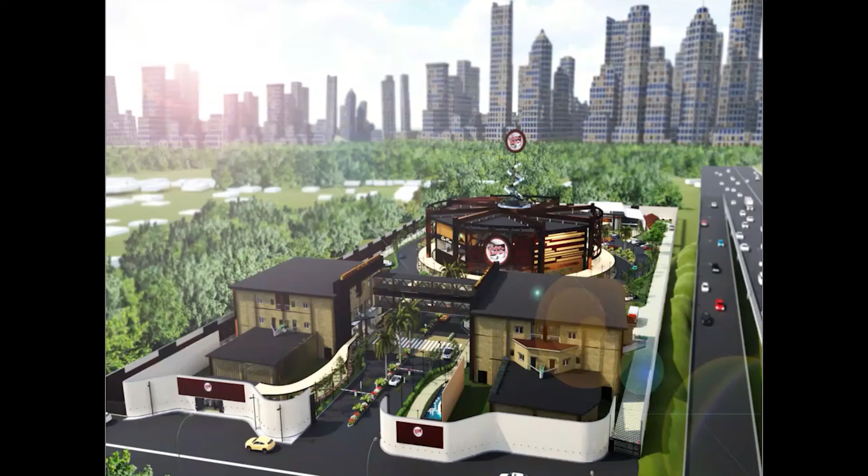Let me once again introduce to you the Karera Akademia, a proposed innovative automobile circuit racing school. Chapter 5, Architectural Design Translation.

5.1 Project Proposal Title and Problem. The project proposal title is Karera Akademia, Proposed Innovative Automobile Circuit Racing School. The proposal is envisioned to provide an architectural design solution for the safety training needs of automobile circuit racing enthusiasts, to be established at the scientifically determined site at Mabalacat, Pampanga.

5.2 Design Philosophy. The proponent was inspired by Norman Foster's philosophy: as an architect, you design for the present with an awareness of the past, for a future which is essentially unknown.

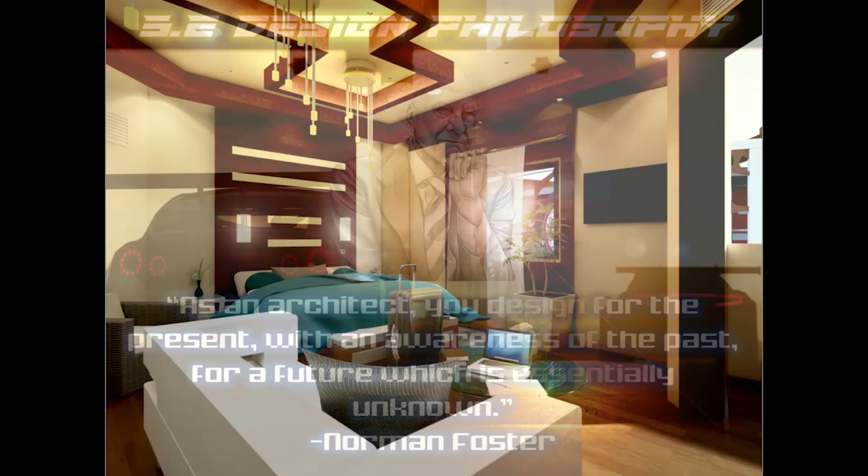5.3 Design Theories and Design Paradigm conceptualized for the facility are natural lighting and cross-ventilation, precast twin wall system, and luxury architecture.

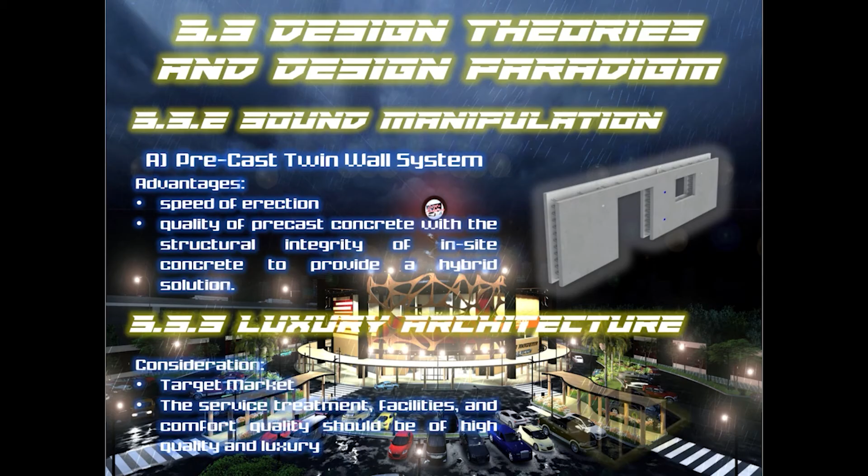5.4 Design Objectives revolve around how the facility could provide architectural solutions regarding the risk of crashing during race trainings, a one-stop concept school, and maximizing the facility's potential to further market the racing industry in the Philippines.

5.5 Design Considerations. Through intensive research, the researcher came up with the most essential considerations in designing this facility: orientation, accessibility, pedestrian and vehicular circulation, building zoning, spatial zoning, target market, low ground clearance cars, privacy and security, building laws and standards, and economical design.

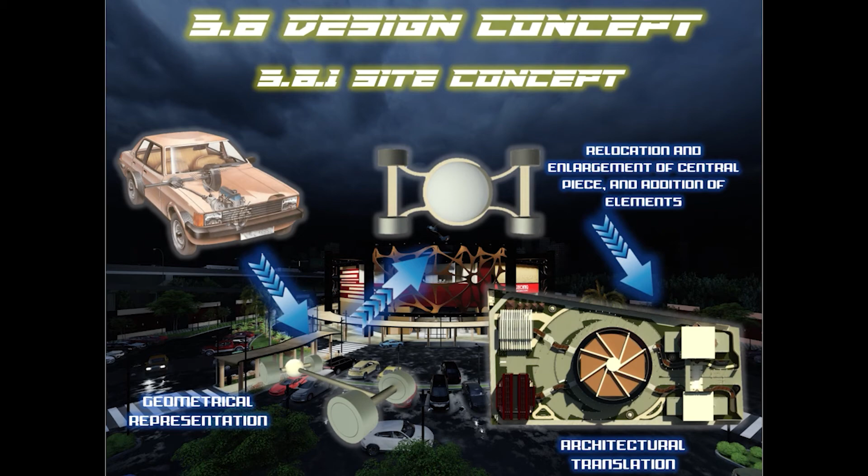5.6 Design Concept. 5.6.1 Site Concept is a car chassis, which represents the backbone of the various parts of the car, the same function as how a site serves the buildings.

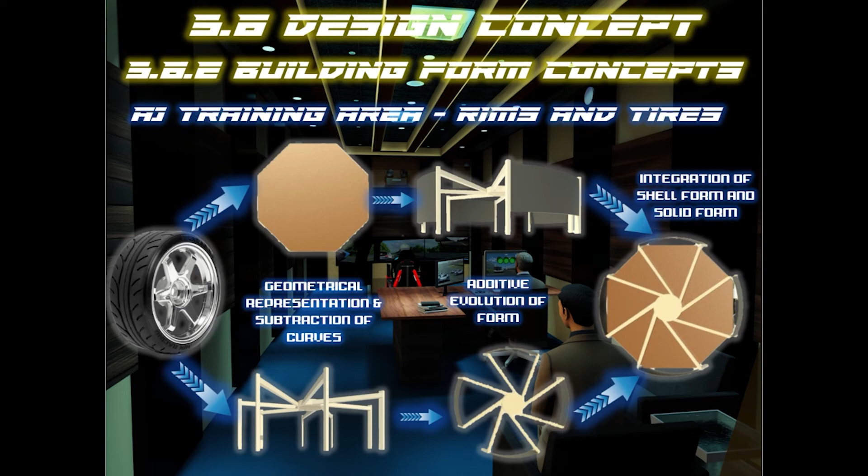5.6.2 Building Form Concepts. Rims and tires inspire the design of the simulation building, functioning as the central piece of a car assembly, similar to how the simulation building functions as a central amenity for the facility. The administrative building is conceptualized from brake discs, functioning as the speed control, comparable to how admin buildings serve as an operations control facility.

Brake hoses inspire the utility building, functioning as a support for smooth braking, just as utility buildings serve as a facility enabling smooth operations flow. Lastly, the accommodations building is developed from springs and shock absorbers because they provide comfort to passengers, just as the accommodations building provides ease and convenience for facility users.

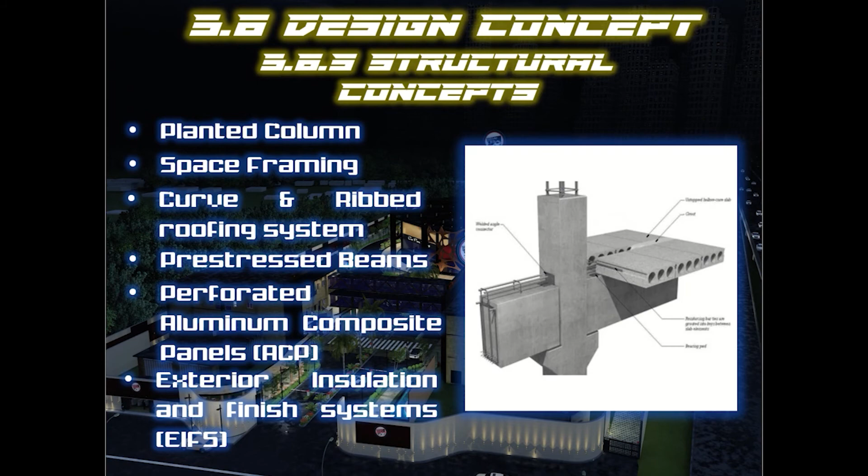5.6.3 Structural Concepts: planted column, space framing, curve and ribbed roofing system, pre-stressed beams, ACP, and EIFS.

5.6.4 Mechanical Concepts: centralized air conditioning, VRF, HVAC, MRL, and car service lift.

5.6.5 Lighting Concepts: general lighting and LED lights.

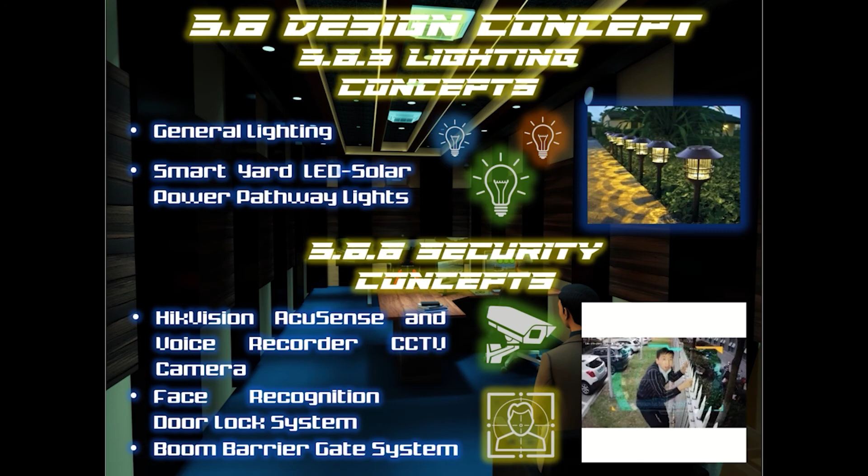5.6.6 Security Concepts: CCTV cameras, face recognition lock system, and automated boom barrier.

5.6.7 Plumbing Concepts: waterless urinals, upfeed water supply, and dual flush toilet with sink.

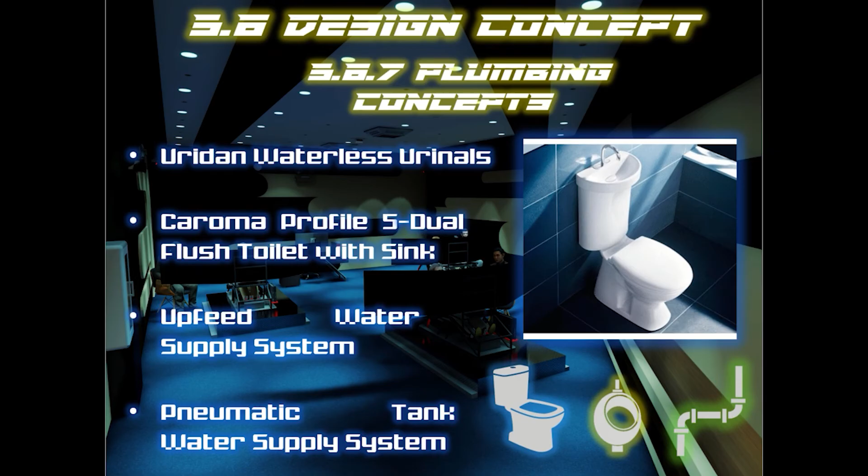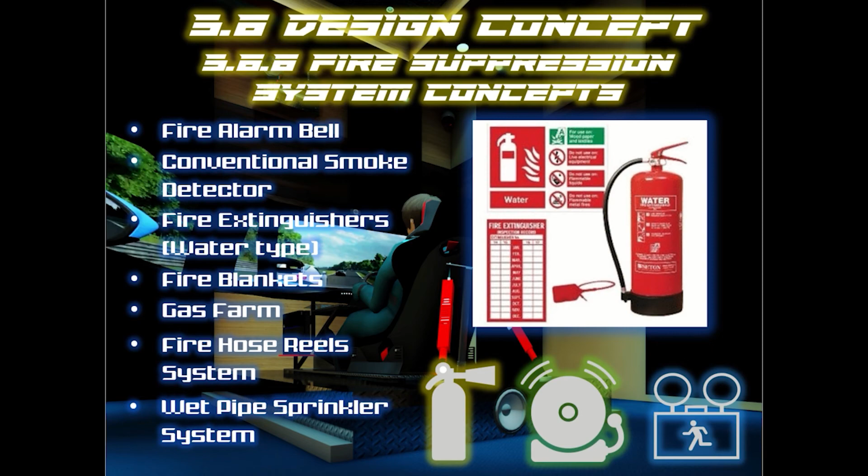5.6.8 Fire Suppression System Concepts: fire alarm bell, conventional smoke detectors, water-type fire extinguishers, gas farm, and wet pipe sprinklers.

5.6.9 Landscape Concepts: turf pavers, road studs, paver lights, and raised pedestrian crossing.

5.6.10 Material Concept: photovoltaic two-way glass and wood.

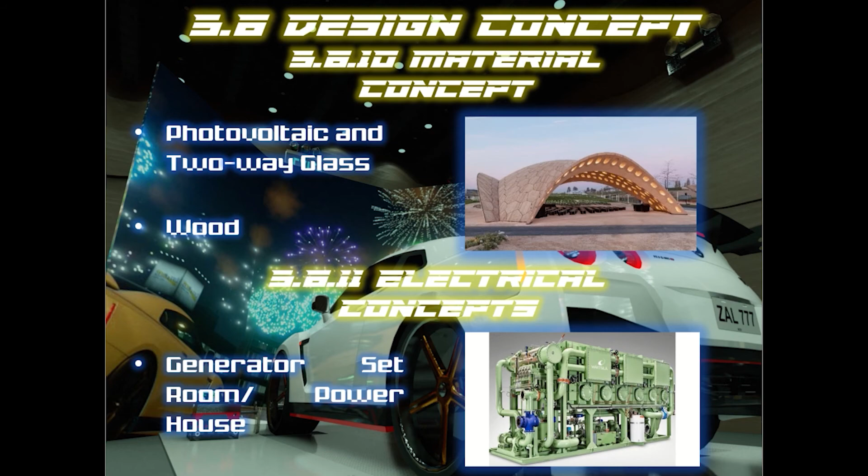5.6.11 Electrical Concepts: genset rooms and powerhouse.

5.6.12 Electronics Concepts: telco cabinets, routers, motion sensor doors, and biometrics.

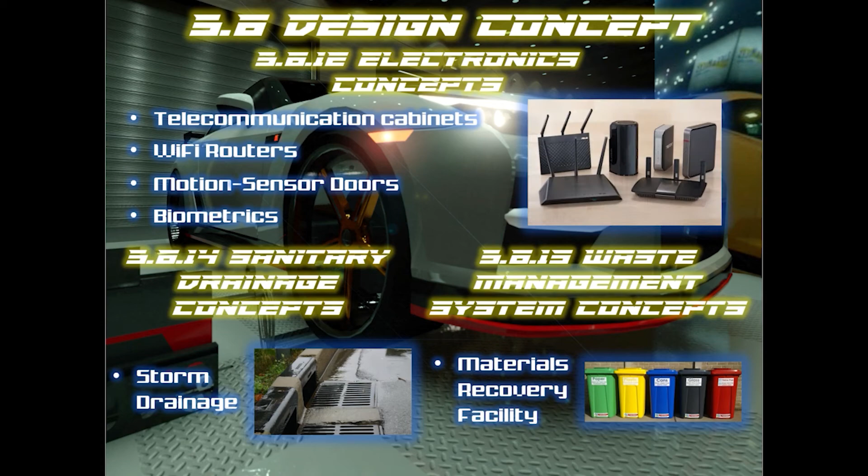5.6.14 Sanitary Drainage Concept is storm drainage.

5.6.13 Waste Management System Concept is a materials recovery facility.

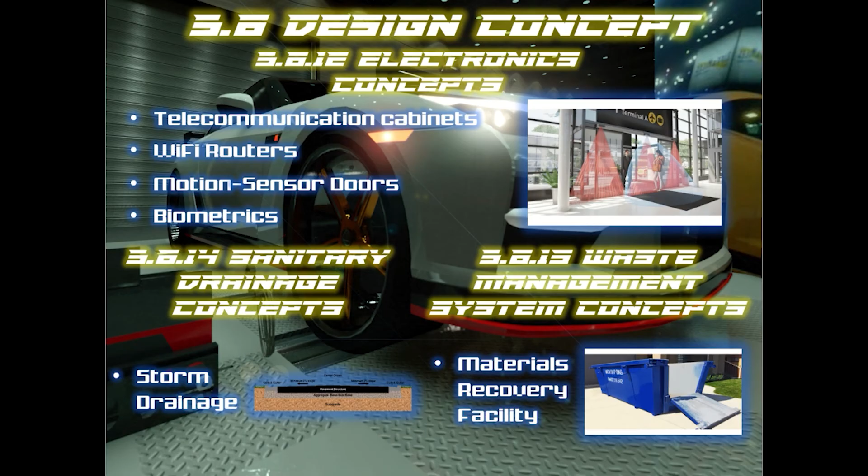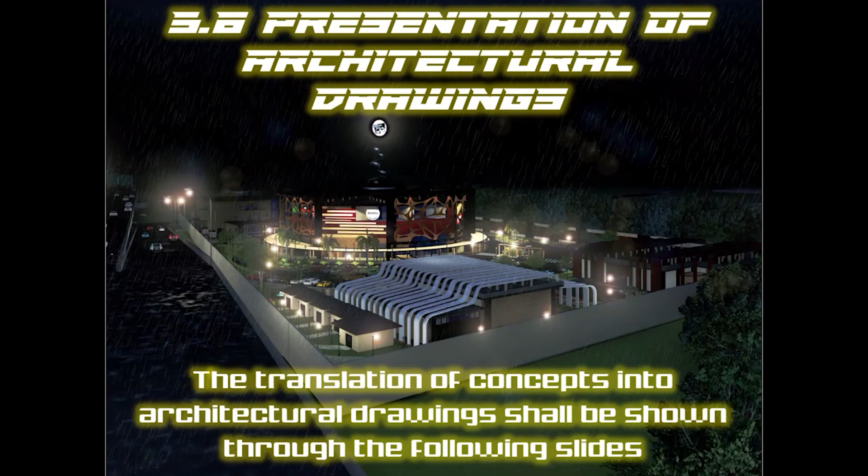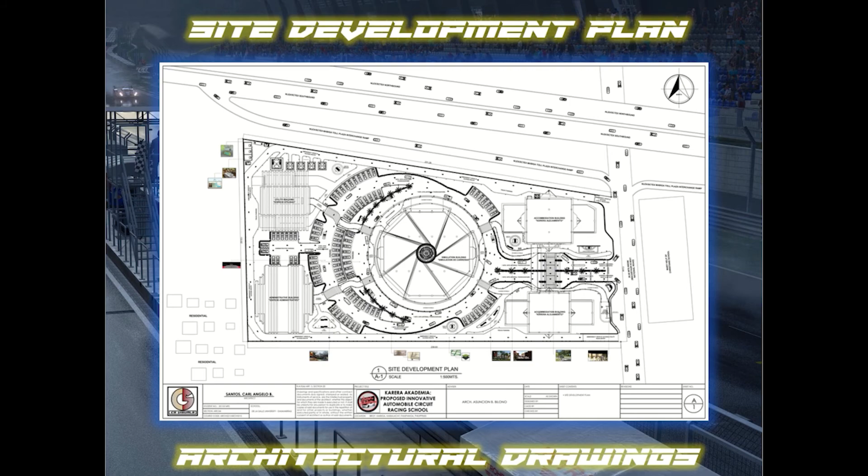3.8 Presentation of Architectural Drawings. The site development plan follows a fluid and continuous planning flow. Hence, the flow of pedestrians and vehicles is meant to mobilize continuously and stop only at designated detour areas. Here is the top view of the SDP.

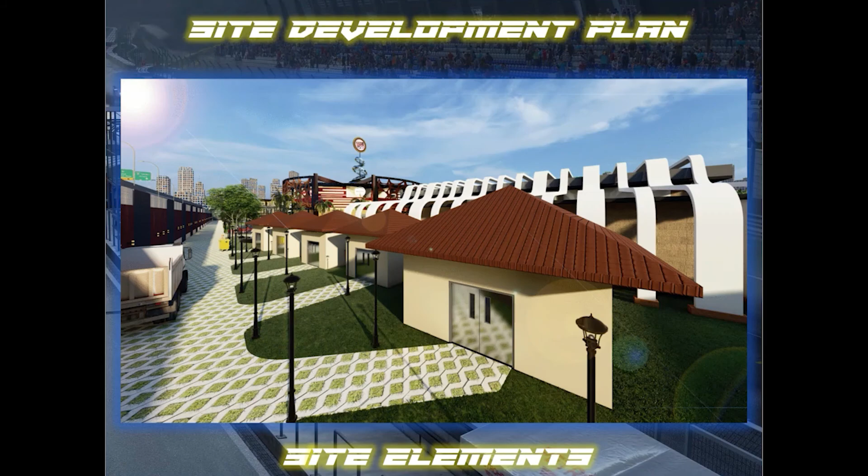The utilities of the facility are the MRF, underground water tank and septic tanks, and emergency vehicle access.

The simulation building plan consists of 3 zones: private, public, and privileged zones. It follows a multi-directional and coordinated planning principle; hence, the diverse phases of the facility function as a whole.

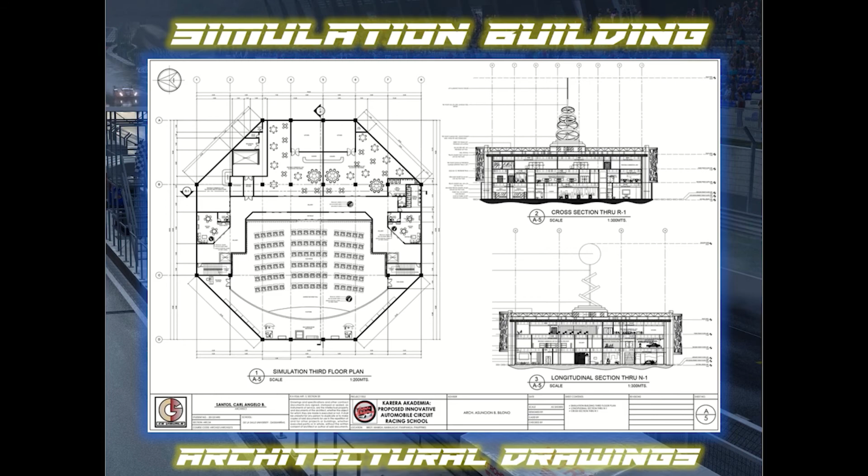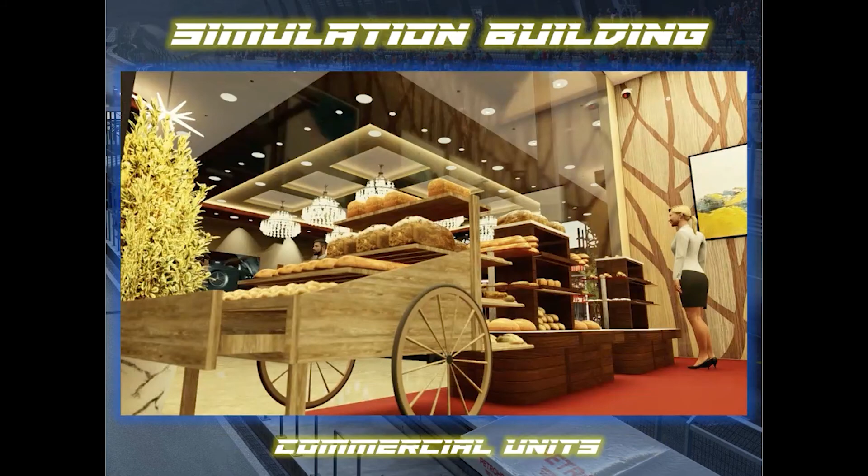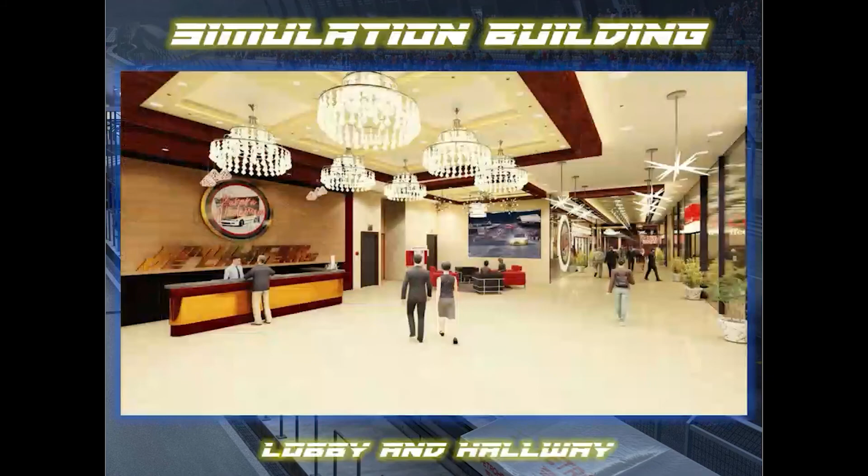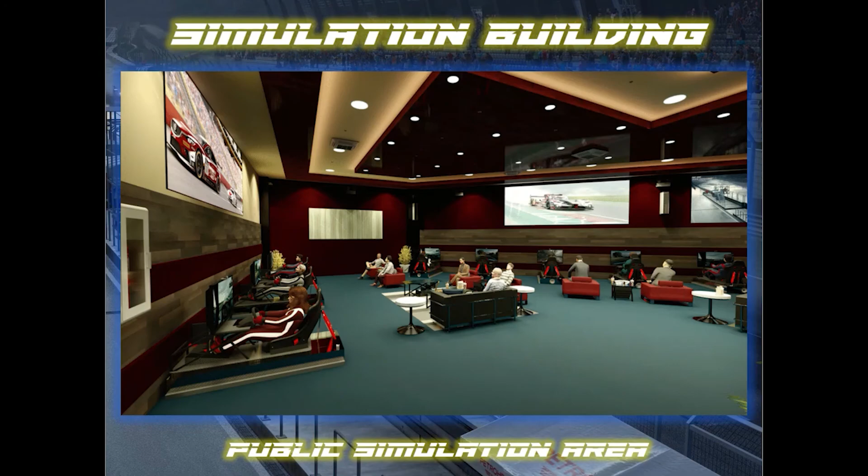OH6 Dove Sim Room, Motorsport Sim Room, CXC Motion Pro 2 Pro Sim Room, Pro Coaching Room, Lecture Room, Tag System TS8000 Sim Room, Bread Shop, Coffee Shop, Registration Area, Lobby and Hallway, Interactive Event Hall, Public Simulation Area, and the Spectators Area.

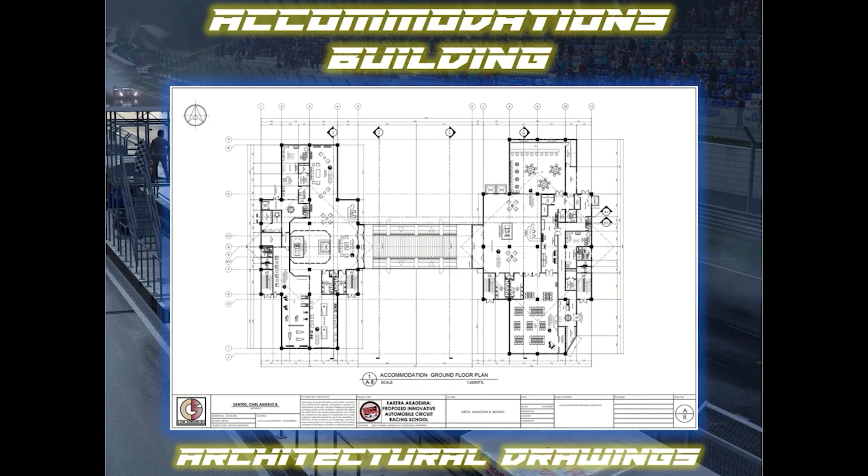Moving to the Karera Alojamiento, or Accommodation Building, the plan evokes the planning principle of limiting factor, thus the majority of the spaces are for private use. It consists of 3 zones: the back of the house, public reception, and rented zones.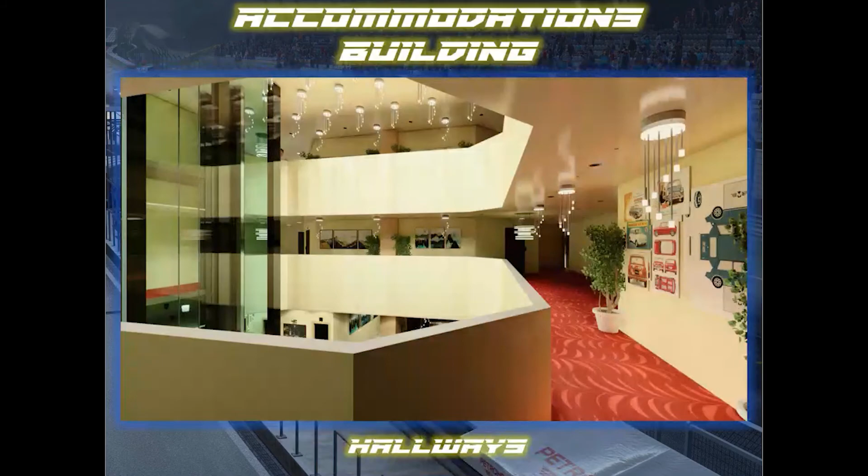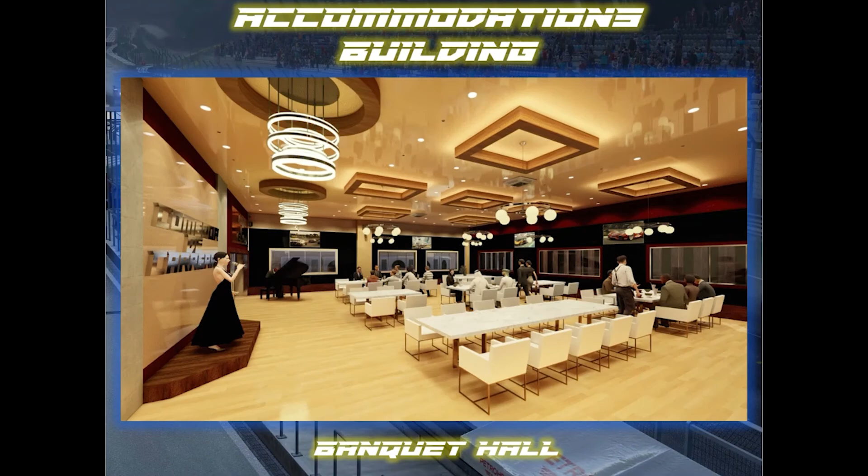Bridge, bar, reading and billiards area, banquet hall, single bed ordinary room, twin bed ordinary room, single bed suite room, and the twin bed suite room.

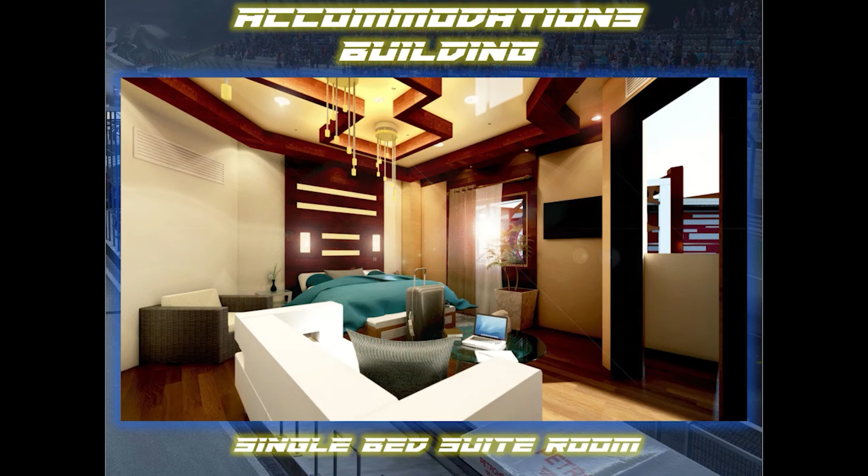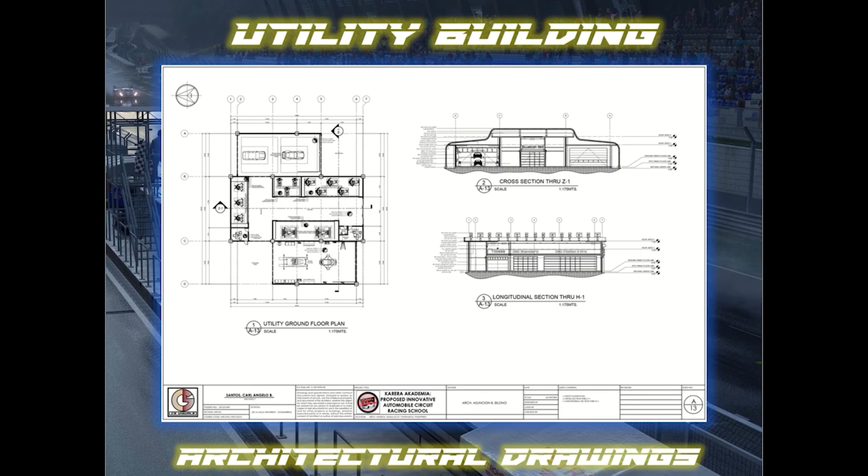For the edificio utilidad, or utility building, it was administered with the planning principle of functionality. Hence, it is focused on providing wide spaces to serve as clearance spaces for the services and equipment mobilization stored and provided within the structure. Utility Building day scene, Utility Building rain scene.

The interior spaces are composed of the storage and reserves room, hallway, and the repair station.

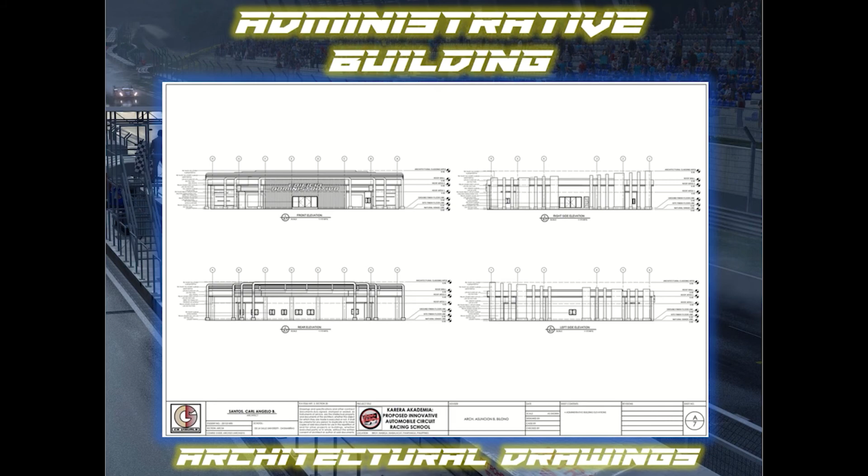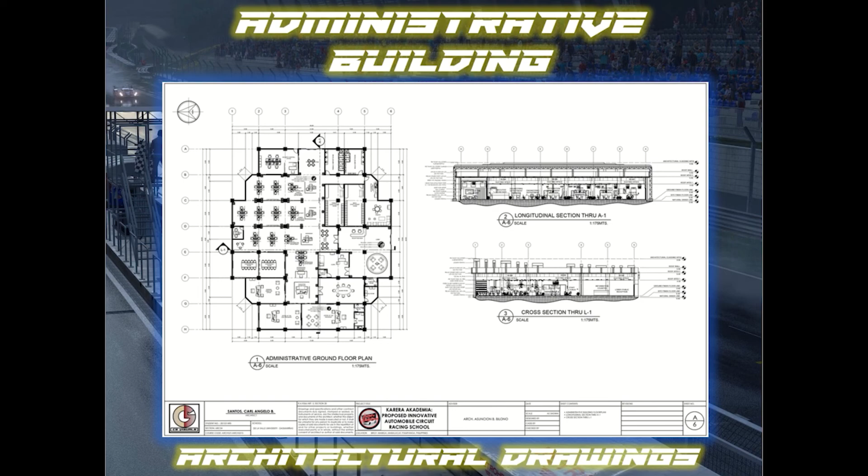Finally, the administrative building consists of 3 zones: the executive zone, staff zone, and the public zone. It follows a flexible and time-bounded principle of planning; hence, the plan can be manipulated according to space demand and generational design trends. Administrative Building day scene, Administrative Building rain scene.

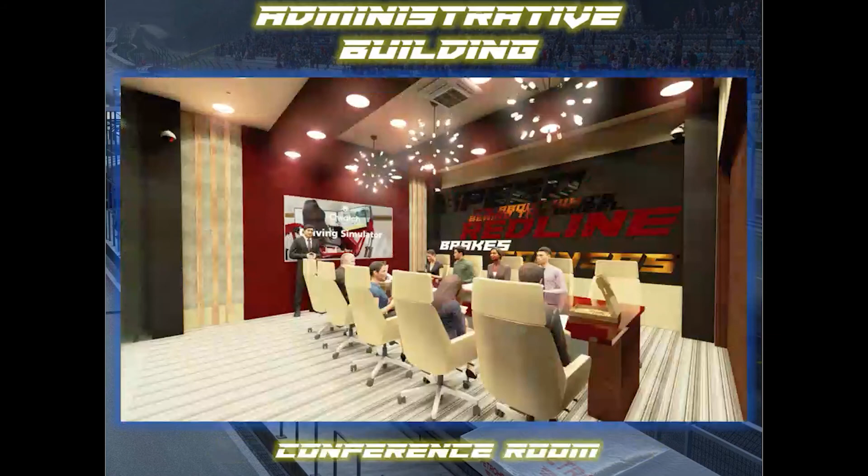The succeeding slides shall present the interior perspective of the administrative spaces: conference room, departmental offices, and manager's desk.

Moving forward, the following slides will show the set of architectural boards for Karera Akademia.

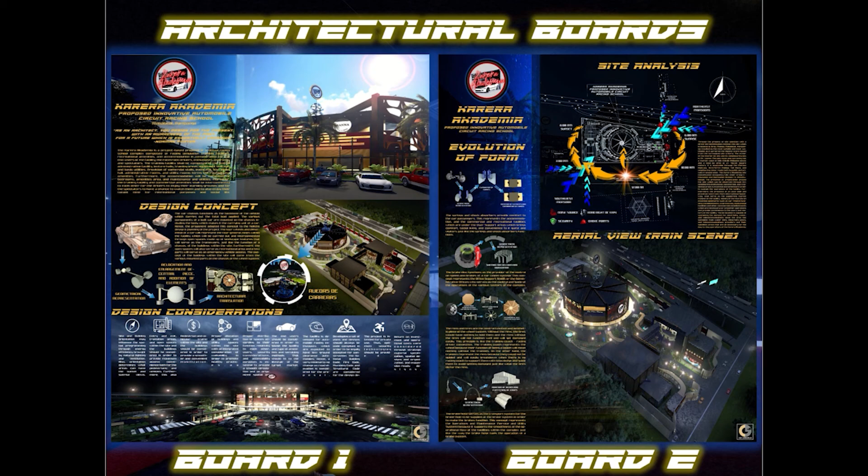Conclusions. The proponent concludes that the Karera Akademia is a complex cultivating a dynamic relationship of learning, social, and economic webs of life. Also, the site and site location were determined scientifically, and the facility is designed to reduce the risk of crash accidents during race trainings. Lastly, a racing landmark was established through an iconic statue of the Núcleo de Carreras.

5.10 Recommendations. The researcher suggests that the study shall have a data gathering update, preservation of the design, provision of auxiliary buildings according to future demand, and design adaptation with respect to the original idea.

And now, allow me to present to you the architectural walkthrough of my proposal.

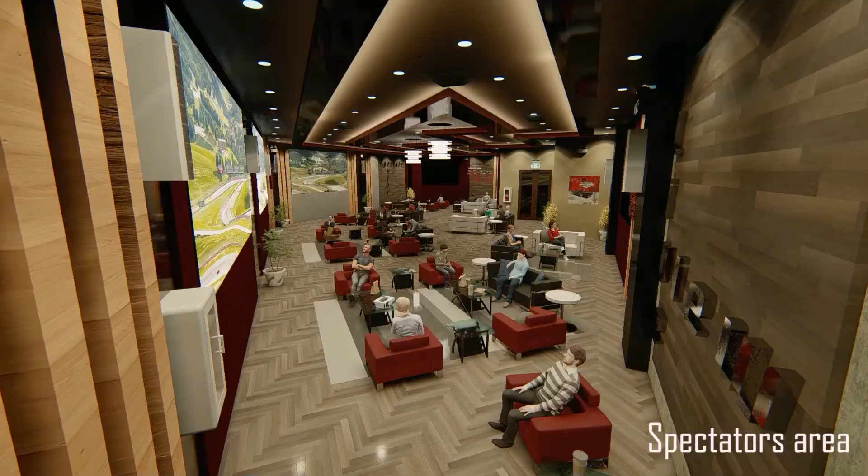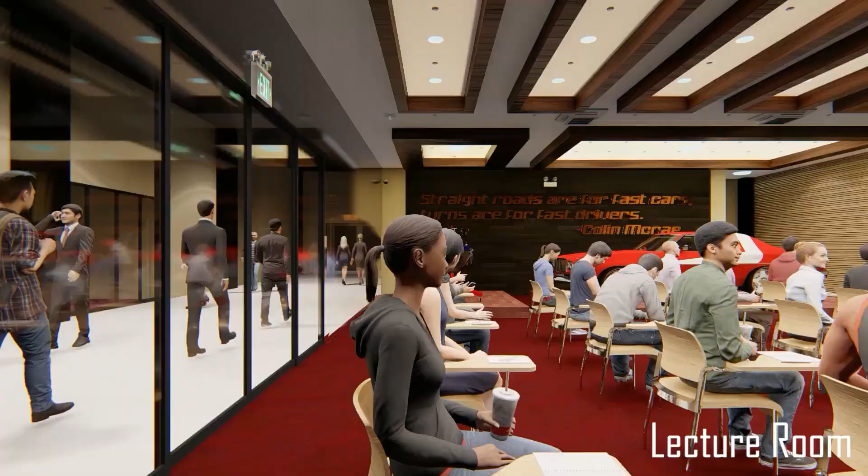It has superformed aluminum panels, carbon inner panels bonded together, and it also has an integral finish.

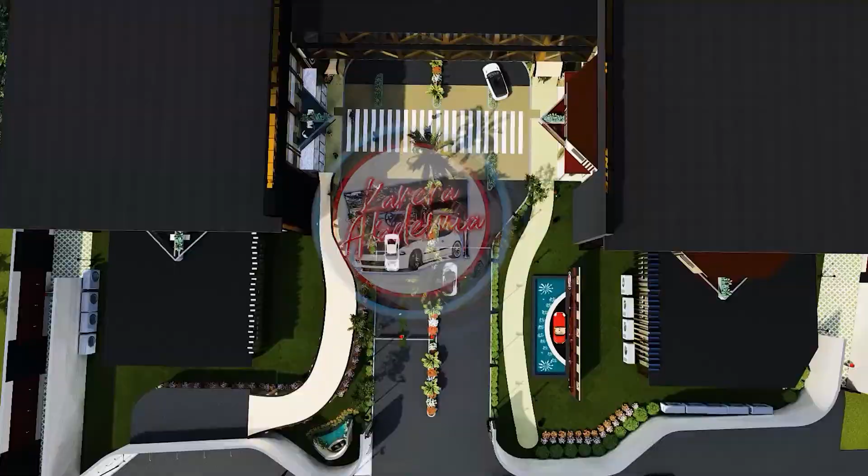And that concludes my presentation of the Karera Akademia, a proposed innovative automobile circuit racing school. Thank you.